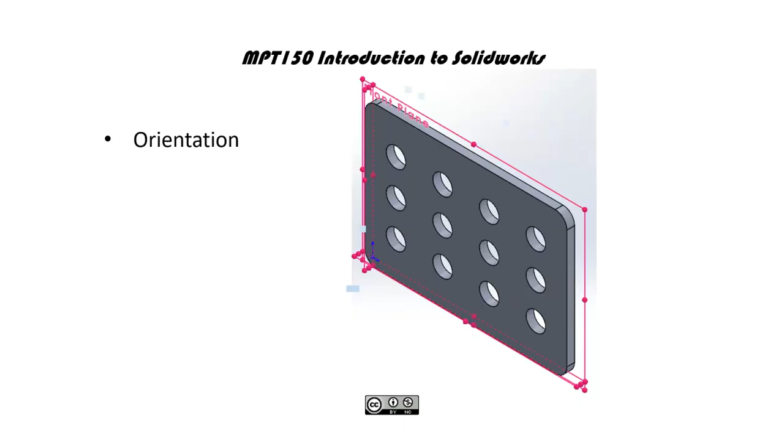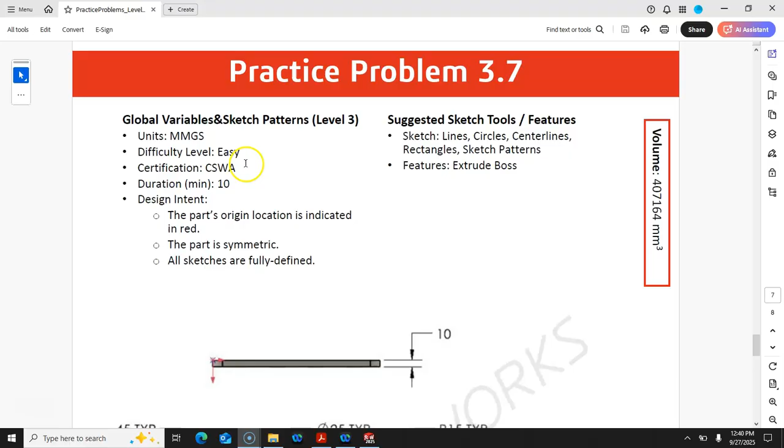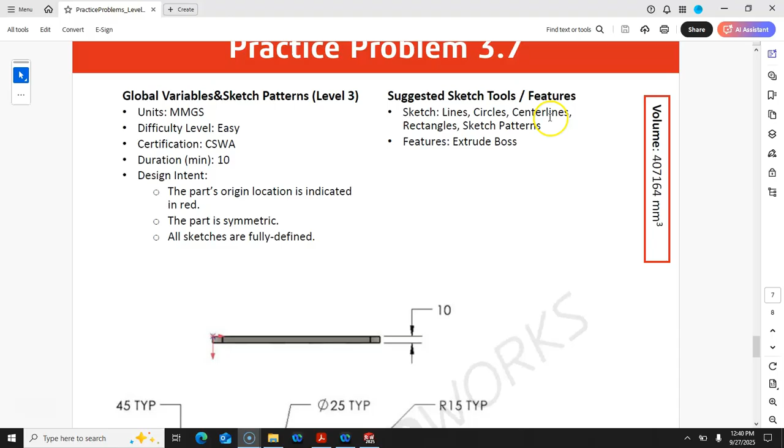All right, practice problem 3.7. We have millimeters, grams, and seconds. Part origin is located at the lower left corner and at the back of the part. Lines, circles, center lines, rectangles, sketch patterns, extruded boss with the radiuses.

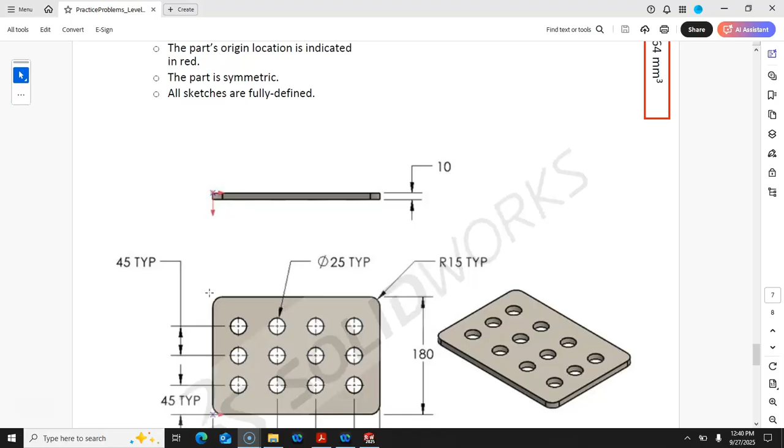We will either do those as sketch fillets, but I still kind of lean towards feature fillets just to make those a little easier. On my hierarchy list, chamfers and fillets are a little bit lower on the list. So let's move this out of the way. No crazy dimensions. We have the spacing, 45, 45, 40 on our dimensions. So let's get into our metric.

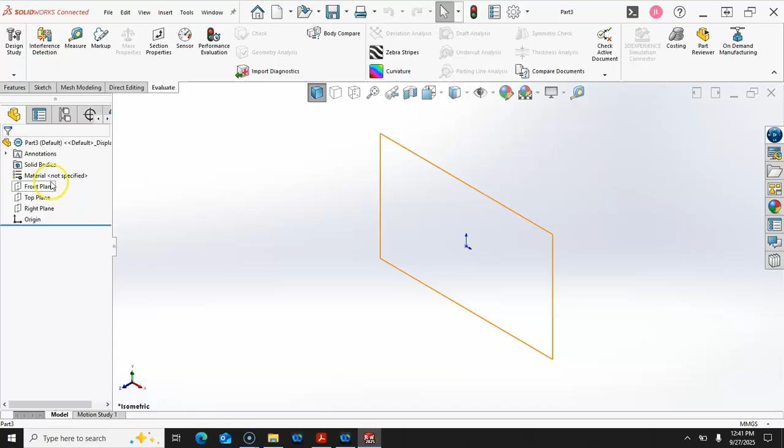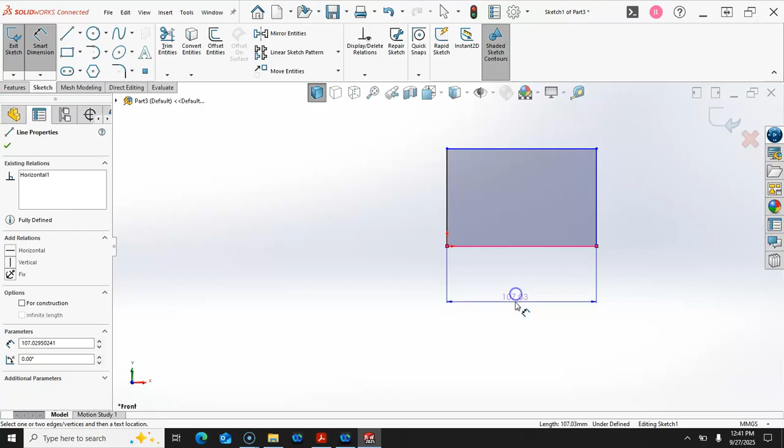On the front plane, open up a sketch, go into our rectangle. We're always going to connect our first piece of geometry or a piece of geometry to the origin. We can go back in and right click to the smart dimension, and then we're 260. And with the scaling on, we'll see that little bit of flicker.

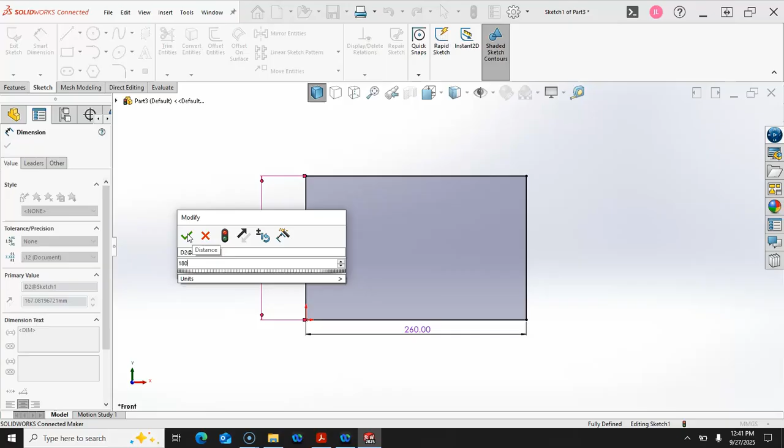The first dimension scales the part, so if it's really small and we put a really big number on it, it does jump, zoom in or zoom out accordingly. For the vertical dimension, we have 180. And let's see, for this, let's go ahead and extrude this. And our distance is 10.

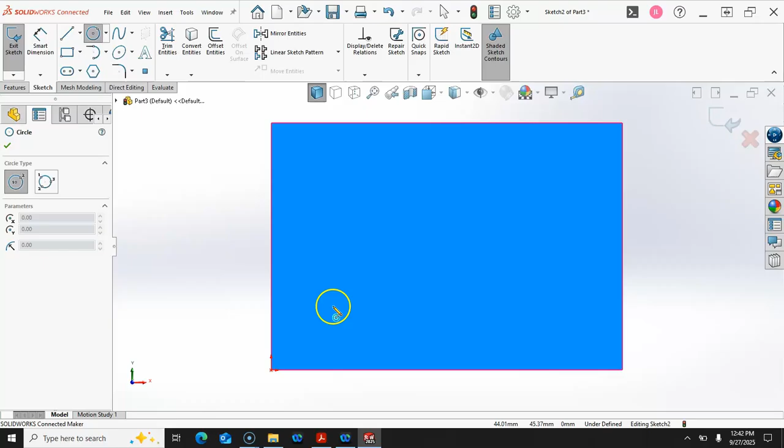All right, and then we'll go back with the sketch. This gives us the opportunity to then decide if we want to use the linear sketch pattern, if we want to use a linear feature pattern, if we want to do a sketch-driven pattern. We have those options to work with. So let's do the sketch-driven pattern, but there are good reasons to not include everything in the first sketch.

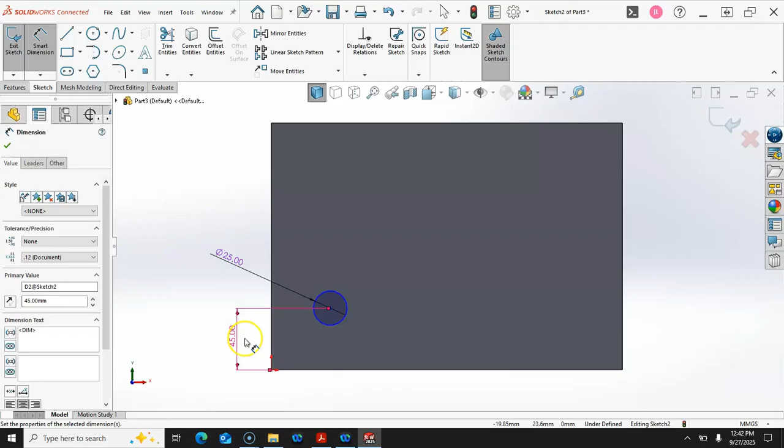So our diameter is 25, and the vertical location from the bottom edge is 45. And then from the edge is 40, but it's off of the other side. So let's go ahead and stay consistent with that just in case the numbers don't exactly line up. So we go to 40.

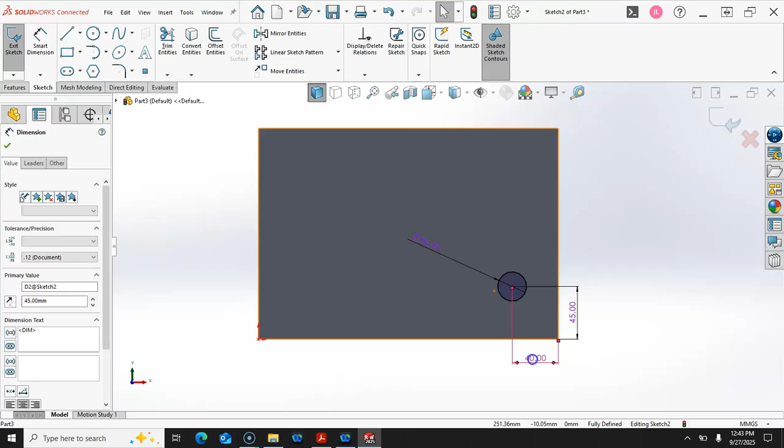So without sitting down and doing the math, the 60 typical, 180 plus 80 should give us the 260, so it wouldn't have mattered. But to help keep track of things, making good decisions on the orientation, especially when reproducing these parts, try to stay as close to the drawing as you can.

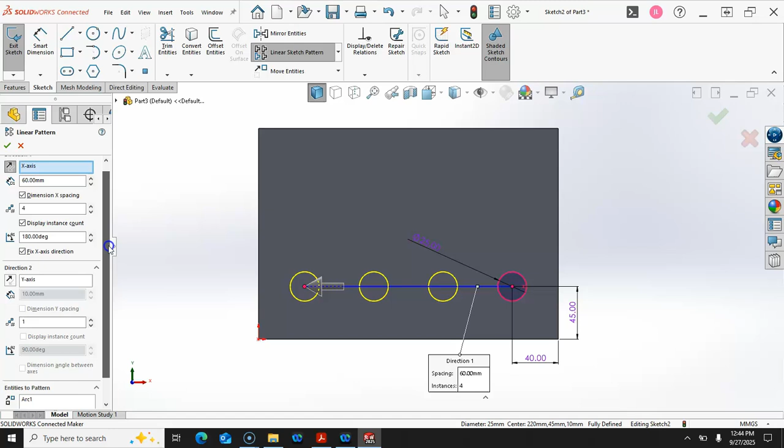All right, so I see the first one is going to the right. We want to reverse the direction. And then we're going to have a total of 4 items. Okay, so that gives us our first. I would like to dimension the X spacing. That's going to give us a center line and a dimension between those first 2 circles. And then we have 3.

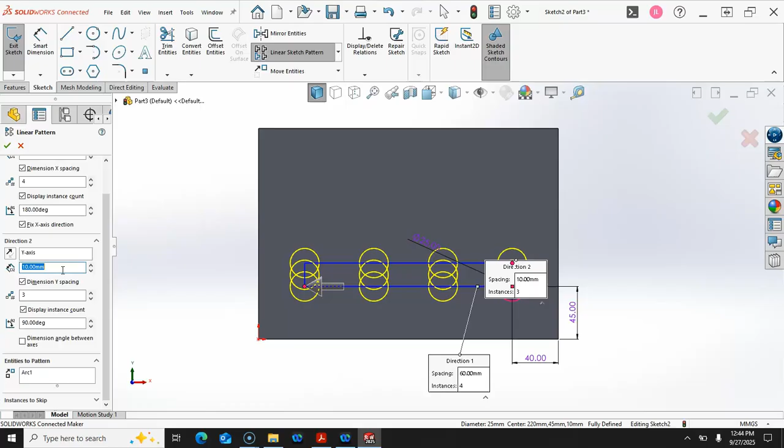As soon as it moves from one row to multiples, then we're going to be able to see the preview for those circles. All right, so the vertical dimensioning is 45, and we'll go ahead and accept. All right, so pretty good. I can see from this, if I grab the endpoint, the only thing that didn't get assigned was the vertical to the center line. That gives us our fully defined geometry.

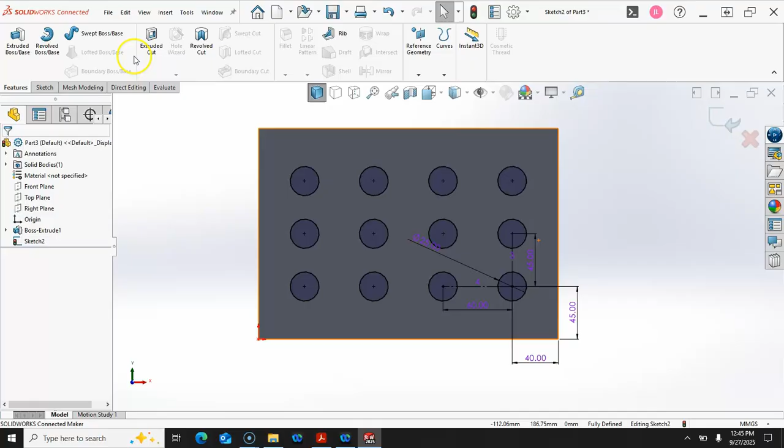So if I hadn't included the dimensions and said dimension for the spacing, then I would have had to do an orientation by picking the center points and saying horizontal, center point, vertical, and then applying the dimensions manually. So that dimension X spacing, dimension Y spacing is a little bit of a time saver. And then we're going to extrude cut and go up to next or through all, whichever one you've picked.

We'll go with the first corner and we're looking at the fillet. And our fillet was radius of 15. And I want to select the others. So we pick that corner and make sure that the opposite two corners are highlighting. And then because the mouse is showing up with a little check mark on the right button, I can go ahead and hit the right button. And that will complete the command.

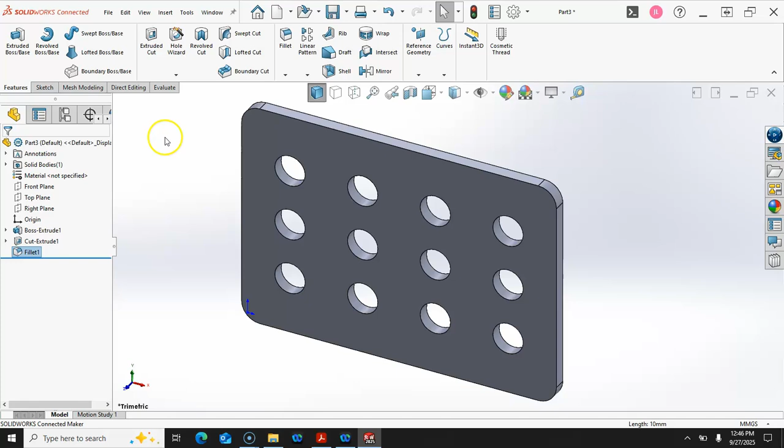All right, so our volume then, going into evaluate and mass properties, we have 407,164. So that is our numbers, so did pretty good there.